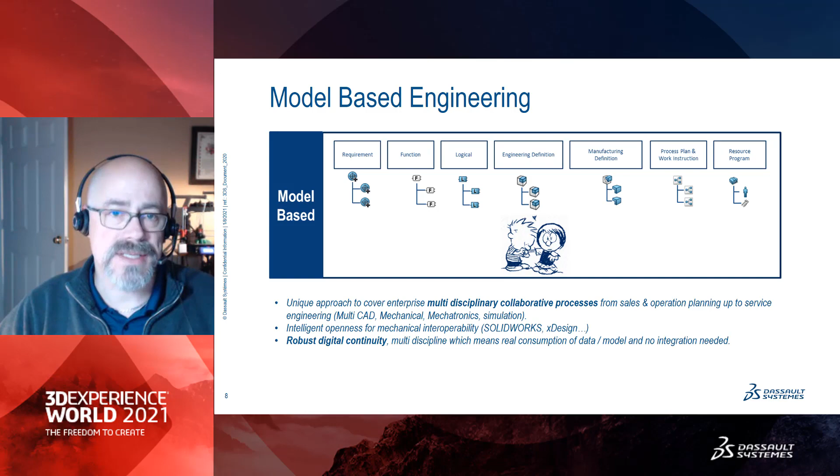Whether it be requirements definitions, logical information, engineering definition, manufacturing definitions. All of these have their different requirements for the overall model-based engineering. How do we bring those all together? Model-based engineering starts to do that, but we need to bring it together.

Engineering is at the core, right? And that engineering definition, you have part numbers, you have designed components, you have purchase components, commercial items, you have software that's being created, you've got mechanical components, you've got electrical fluid, electronic software, a wider range of things that all define and come together in this engineering definition.

The CAD designer is working on their tools. The BOM engineer is pulling together information for the rest of those areas. So we talk about the bill of materials on a regular basis in the context of SolidWorks.

A bill of materials at its core is a list of raw materials, subassemblies, intermediate assemblies, subcomponents, parts, quantities of each needed to manufacture and produce that end product. From the engineering point of view, that's taking into account all the individual physical components that go into this product.

From the manufacturing bill of materials point of view, now we're starting to say, what are those components? How do they come together? How are they fabricated? How do we get them to be a finished product? Of course, from the purchasing point of view, we need to source where do we get those components.

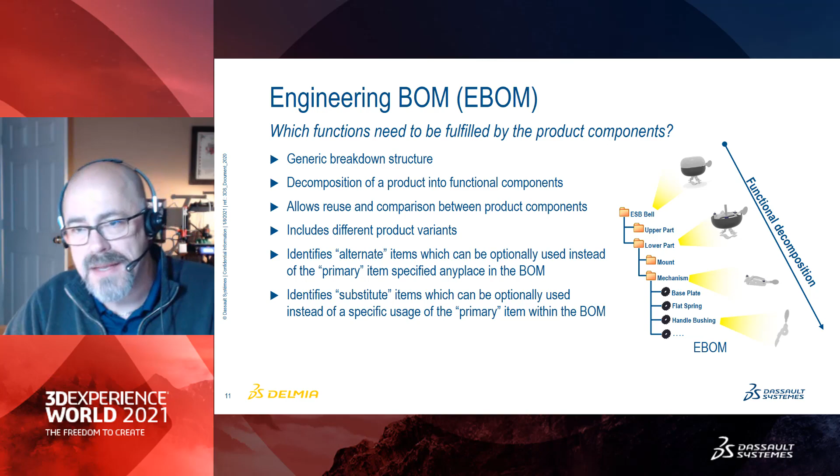All right, so the engineering BOM. This is a generic breakdown of the components. There's usually individual parts. There might be alternate items. There might be substitute items. But at the end of the day, they come together to create that physical product.

Manufacturing BOM, as I said earlier, gives us a means of what are the assembly steps. What are the processes to take raw and purchased components and pull them together to create that final finished good?

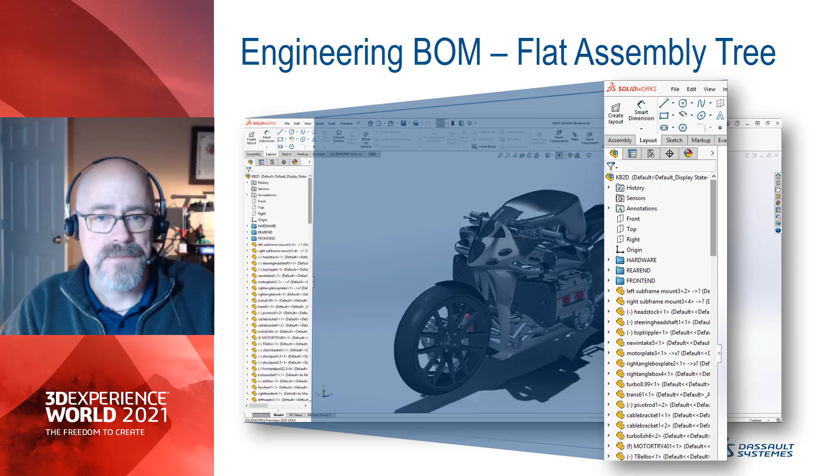From an engineer's point of view, they're going to create that engineering bill of material, that assembly tree that's associated with the components and the final assembly, and put it together in the form that they need to.

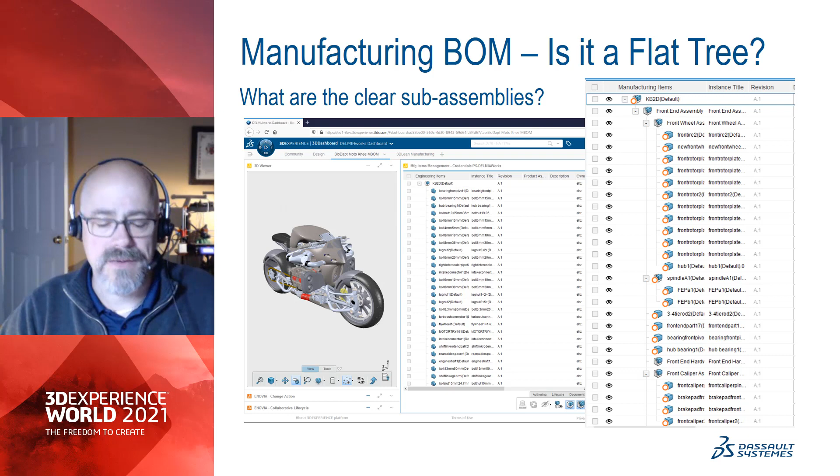From the manufacturing point of view, it's not necessarily a flat tree. In this case, we've got this motorcycle that's got a lot of different steps, maybe assembly steps that we're taking into account. That's where the platform gives us tools that allow us to take the engineering bill of materials and convert it into the manufacturing assembly tree.

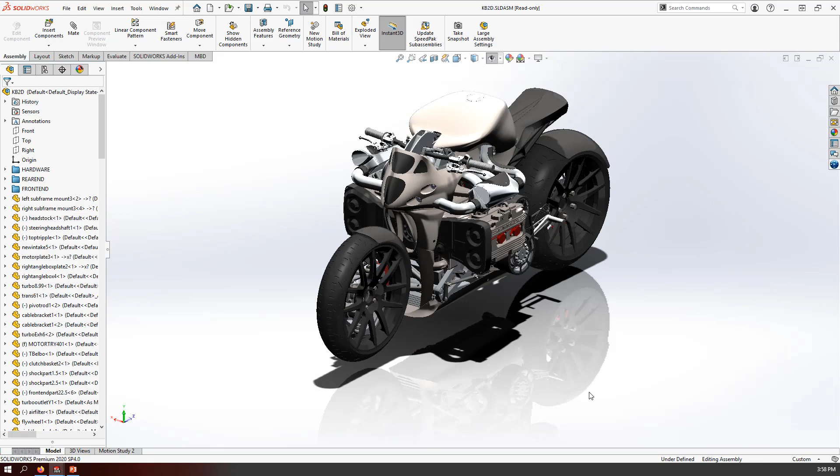So let's have a look at what I mean from the engineer's point of view. Here I have the motorcycle, this kickboxer motorcycle, and as the engineer, I've pulled this full assembly together, and I've left it in a flat assembly tree.

To be sure, I've got some clear sub assemblies, one for the front end here, one for the rear end, maybe even some hardware that I just wanted to pull together. I'm leveraging folders within SolidWorks to accommodate that.

And naturally, because I'm working with the 3D Experience platform, I'm using the platform as a tool to keep track of what my files are, what the revisions of my files are. I'm letting that happen up in the cloud with the 3D Experience platform.

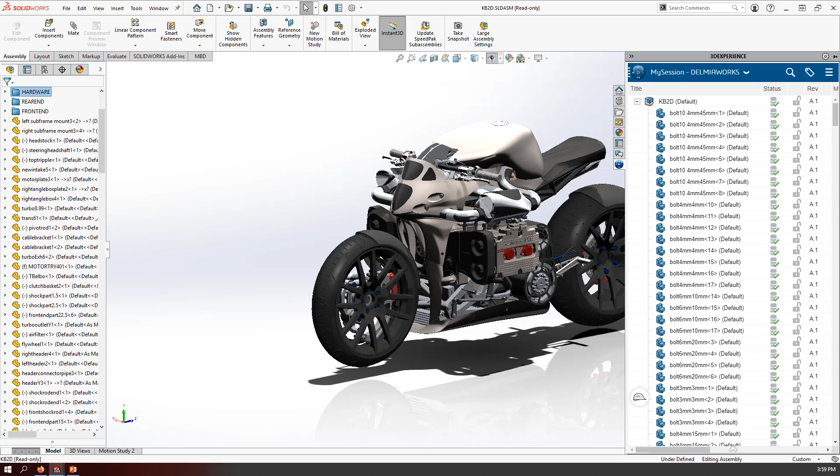Now, if I switch gears for that, once it's on the platform, I have this engineering content that's already up here, ready to go. I can see my full tree of that motorcycle, just like I saw it in SolidWorks.

But that's for the engineering point of view. From a manufacturing point of view, I've started to pull together a manufacturing subassembly. So I've got the front end assembly already in place. I might have a hardware kit that represents just the hardware, so I can kit up the hardware that I'm going to need to assemble that front end assembly.

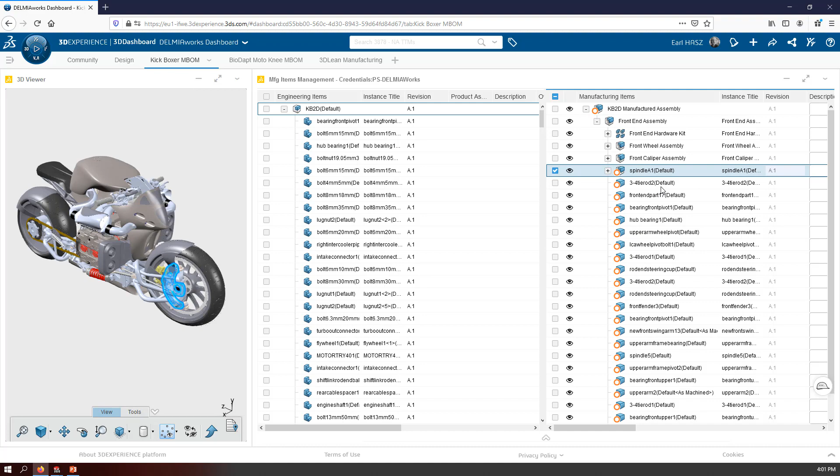I might have that front wheel assembly, and within that wheel assembly, I might obtain a front caliper assembly. I'll get the spindle, and all of the components that are necessary associated with that particular assembly. So I now have some different assembly steps in place from the manufacturing point of view, and it's independent of the engineering tree.

Okay, what did we just see? I showed you the process of the manufacturing assembly. I showed you some provided parts. We talked about the hardware kit, that manufacturing kit, the kit of parts that I need to pull together for a given assembly step. That would be my manufacturing kit or my hardware kit.

I didn't talk about the manufactured material. That would be your raw material, perhaps a stock of aluminum billet, and we're going to mill it into one of the components for that front end assembly. So that would be a manufactured material. We take raw material and the finished component, bring it together. That would be part of my manufactured assembly.

So let's have a look at the specific steps. We're going to have our core assembly from the engineering point of view. We'll put that into manufacturing items management. We'll see that listed in the tree, and then we'll create manufacturing assembly scopes, and create the connections between the two. We'll create subassemblies as we need to for the assembly process, and define the scope for that. So let's have a look at how that works.

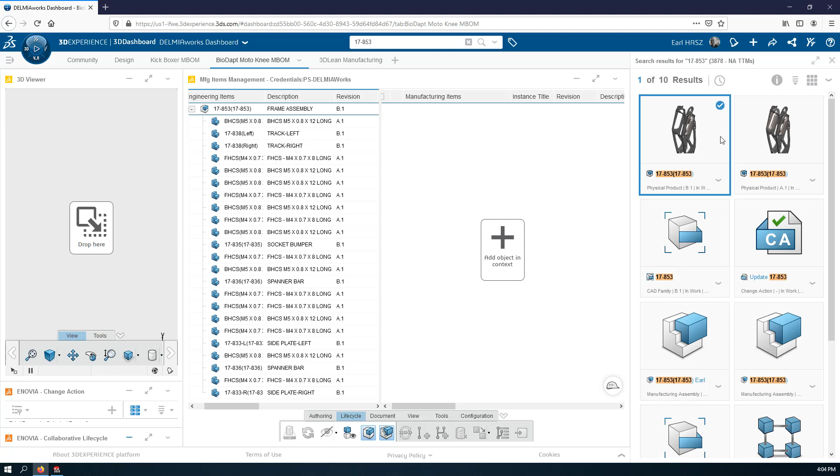So what we're seeing here now is the same assembly tree of that calf, and we'll go ahead and create a manufacturing assembly for that calf to get us started.

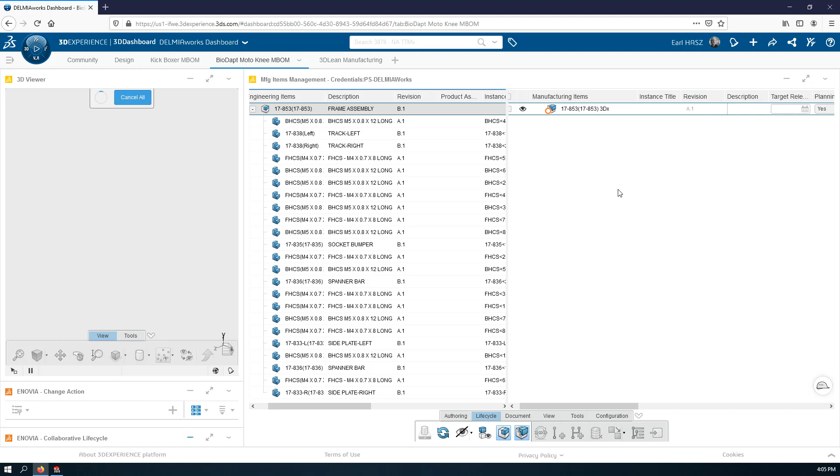All right, so we now have this in place. We've got the full calf and selected, and to be sure, from a manufacturing point of view, I might just assemble all of this at once. But what I'd rather do is break it down as if we were building it in multiple steps.

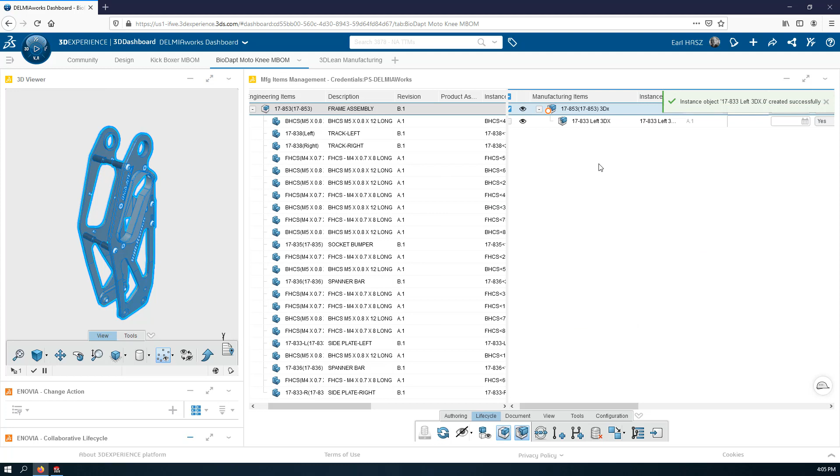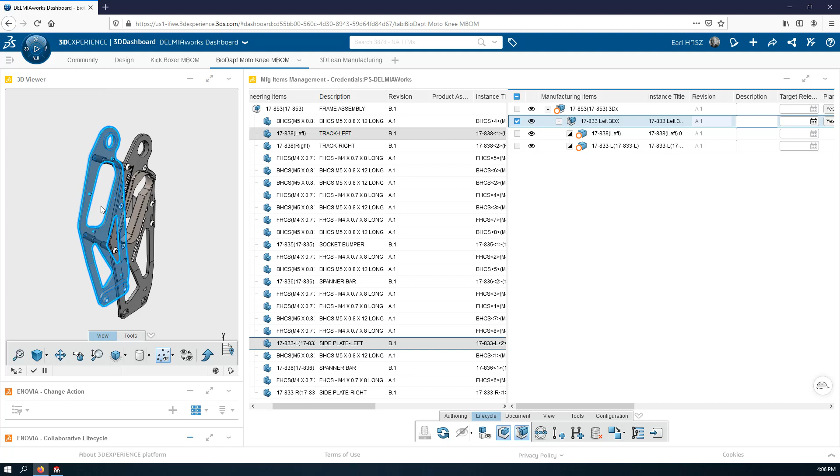So let's say we're going to work on just the left-hand side, for example. We'll go ahead and create a left-hand side version of this, and that left-hand would be the left side of this guy, and we'll find the side plate of that as well. So now I have, if I look at those two, the left-hand side and the components for the left-hand side in place. So let's continue this path.

We'll go ahead and grab the various hardware for that. I always find the wrong ones. So we'll grab the hardware for that left side.

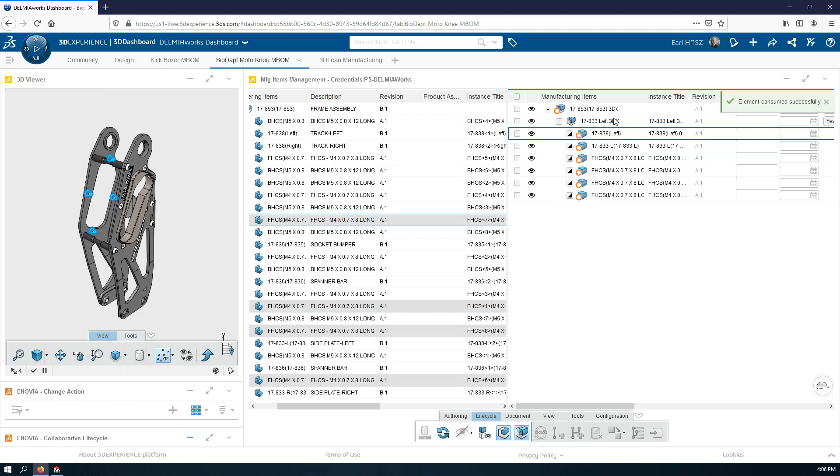So I've built up the subassembly for the left-hand side, and we'll do the same thing for the right-hand side. Grab the right plate. And of course, I moved those into the wrong location, so let's go ahead and move them into this guy here. So we'll move them.

So we get the opportunity to decide, are we going to create new instances, additional instances, or are we just going to move those. So I'm going to take advantage of moving those around and restructure it.

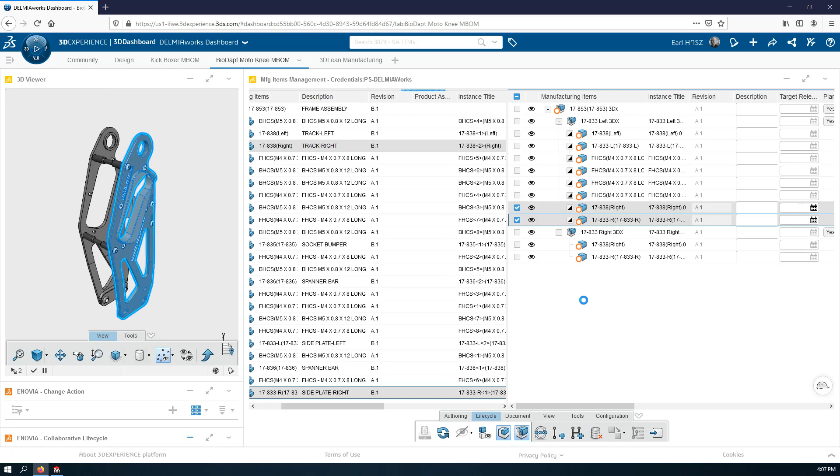So again, the engineer pulled together the assembly tree on this side. I'm building up the tree that represents the assembly process. So that's independent of what the engineer's working with in this regard.

We'll go ahead and grab each of the flathead cap screws, add those in. And as it's building all of this up, I go through and look at some of the tools that we have. We can actually see which components we've actually taken into account, so I have a visual cue.

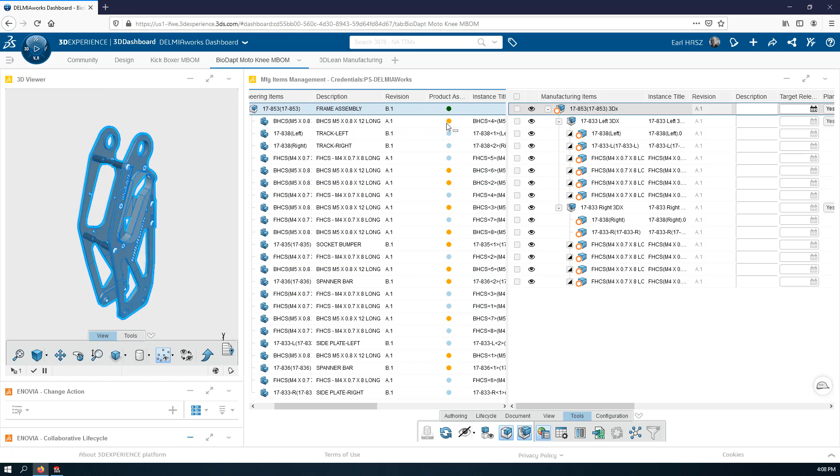So this is the top level assembly, but then I've taken into account each of these separate items in my tree. So I know that I have additional work to be done on these other aspects. So what I'm going to go ahead and do is go grab these other items. We'll just drag them into the top level here.

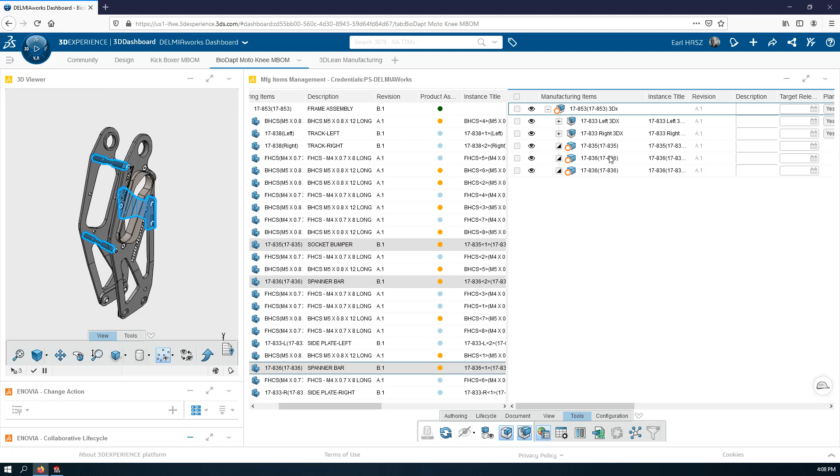So now I've got the two subassemblies, the left and the right-hand side, and the main parts of the assembly. Now I could go ahead and create and bring in all of the remaining hardware. So this gives me now the full tree that I have that I'm looking for my overall system. Now it's ready for assembly.

All right, so we've created that content. So now what happens? We've built up that assembly tree. We've sent it off to manufacturing. But now we might have that scenario where we're going to follow the process as we make changes to our assembly. So the first step is to modify that structure, and we would do that in the context of our CAD system.

The platform gives us a tool to do some revisions. We'll create a revision and we'll replace that with an example. So let's have a look at how that works.

All right, let's head back over to SOLIDWORKS then. And again, we're working with this CAD, and at the moment we're going to make some changes. So let's start off by focusing on the right-hand side of this guy. We'll go ahead and create a new revision for the side plate here, and let's go ahead and create another for this particular side plate. So we'll just go ahead and add a couple of revisions to that.

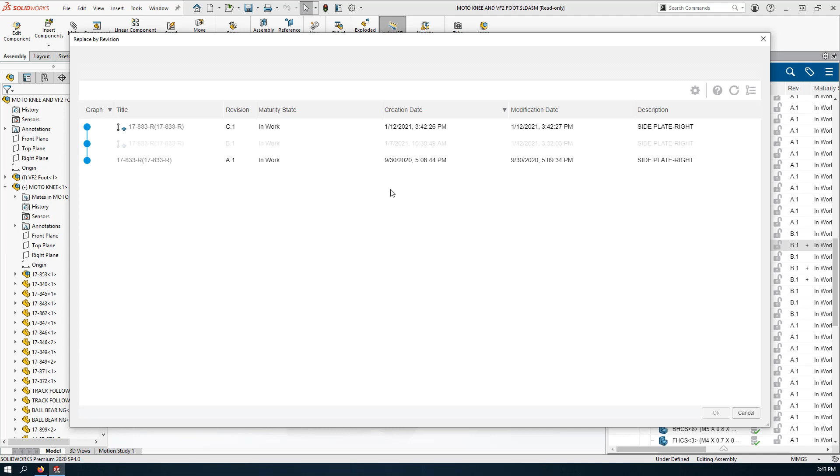And so now it's listed as being out of date because there's a newer revision in the system. So if we come back into here, we can go ahead and replace with that revision, and we can actually see which revisions are out there. We've got the original, we've got the next one, and we'll go ahead and grab that latest revision, get it replaced.

So naturally, if there was geometry changes to it, then we would see it there. But in this particular case, we're not. So let's go ahead and replace the second one.

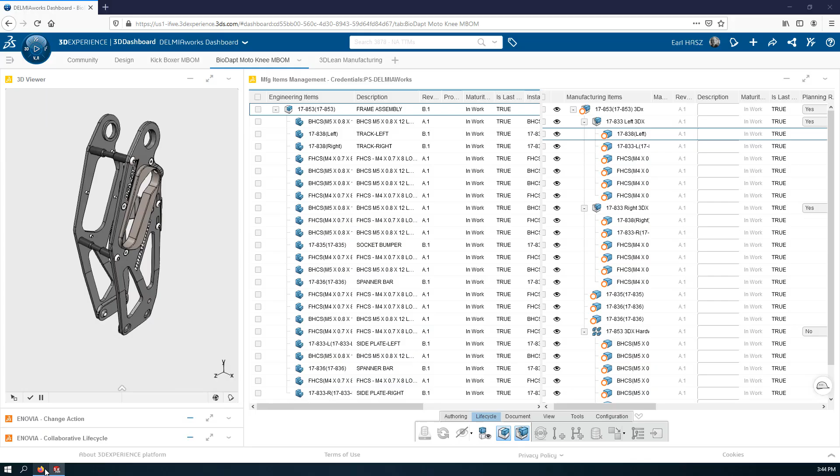And so now we've got the updated versions of both this guy and this guy. And of course, because it's the same component, the other side has been updated as well. So now we've updated the system for the different versions. What we just saw was that assembly tree, and we've just created a simple revision in SolidWorks. We could do this wherever we're working, whether in XDesign, SolidWorks, or any other CAD system connected to the platform.

So the next step is to do an MBOM impact analysis: find out what's been changed between the engineering bill of materials and the manufacturing bill of materials. We'll do this through the manufacturing items management tools, or MFG, and we'll see that in the context of that product assembly - what's changed and what parts or assemblies in the tree need to be sorted out.

The next step of that process will be to generate a change action. So we will go through and use some of the ENOVIA tools to create a revision, effectively an ECO - a change order for our MBOM. So let's go ahead and create a change action for our assembly tree as we change it.

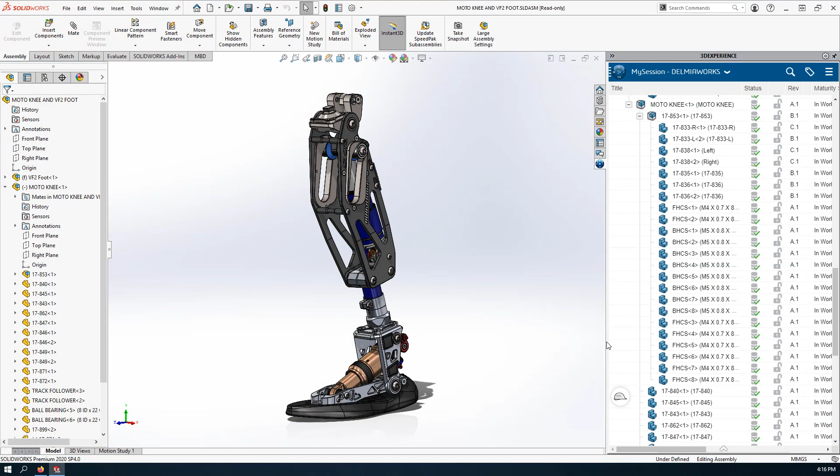All right, let's head back over to the platform. Now that we have items in place, let's have a look at what we've done with this guy. Now we start to see that the components we've made changes to are now no longer the last revision - we can see that these things are out of date.

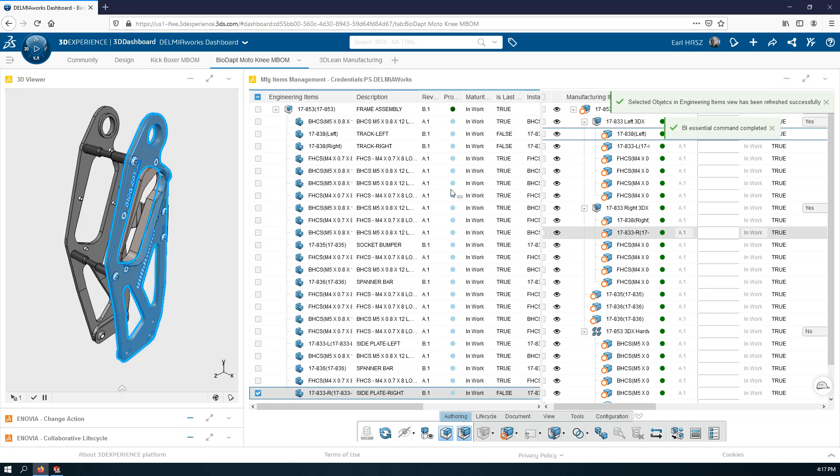So what we'll go ahead and do, once we've updated our view of this guy, is create a change action. A change action is simply a process by which we're creating an engineering change order. In this case, it could have been done by a leader, or it could be done by the engineer.

We're just going to go in this case and update our MBOM. So we'll update, and we'll go ahead and save that. We could give it a due date, a severity level, and so on.

As we start to look at what that means here, we can apply it to whomever is interested in it on our team, whomever has activities associated with it. In this case, that's going to be myself - I'll be the assignee, I'll be the approver, and so on. I could also be the informed user if I was someone who needed to know when something changed, but not necessarily know information about it at that point.

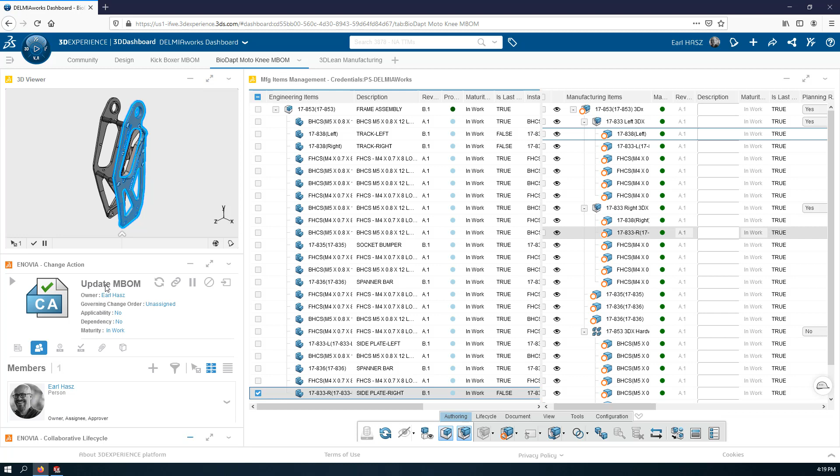So now that we've created that, we've done the work - let's set that into being in work. We've gone from a place where we've assigned that change action, and now we're switching gears to a point where we would apply it to the actual activity.

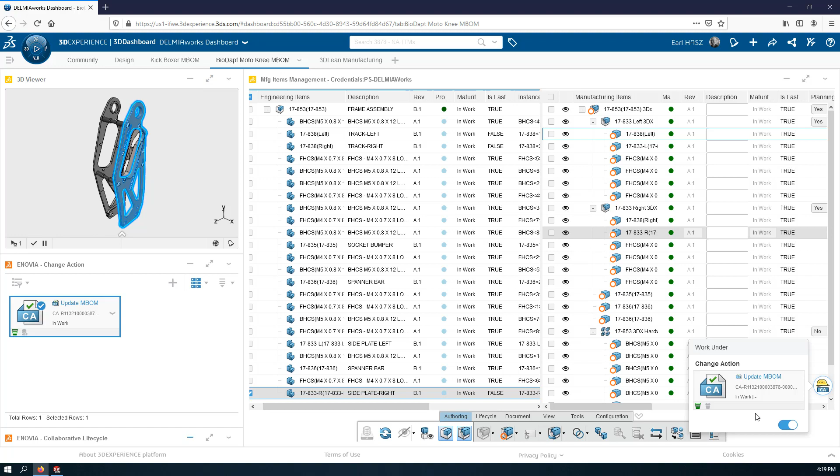And so we'll go ahead and apply it to the manufacturing items management, since we've got some changes that need to occur to that. At this point now, we've created and defined the change action that needs to occur here.

All right, so we've created that change action. Our next step is to go through and update the MBOM - we need to make changes to both the MBOM and get everything up to date. So the first step is to find out what's changed.

We'll make sure that the engineering side is up to date, so we'll go ahead and do that. The next step is to make sure that the MBOM is up to date - it's going to make sure we can connect those two together, make sure we have the right versions of each of the components, and give us the tools for understanding what we need to do.

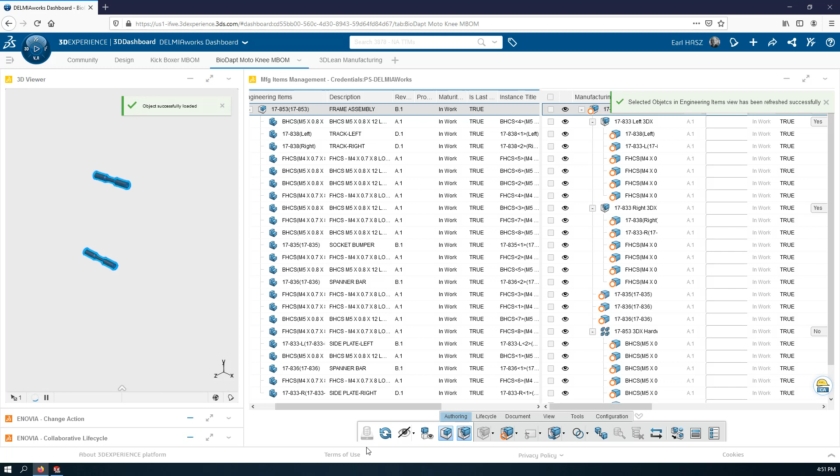All right, so let's go ahead and update, refresh our screen here with the latest and greatest version. And so we have the updated version of our tree, and let's go back into our BI tools, and we see that the components we've changed are now updated with the content we're working with.

So what we can do here now is go through and actually say, all right, which ones have been updated? Let's go ahead and update the items based on the changes. This gives us the opportunity to update these revisions as we like - we can do this automatically as we need to.

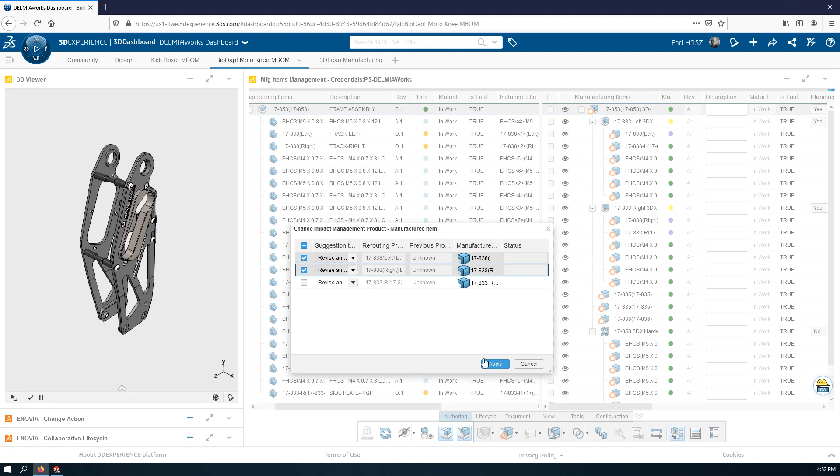So that guy's going to go ahead and update the 17838. If we look over the 17838, that's been updated to the new revision, and it has created a new revision based on the model. So if I take a look at the revision, it's pointing to the appropriate revision of that component.

We see that I still have some work to be done here on the 17833R. So we can go in and take advantage of creating a new revision of that component. It'll add a new revision to this guy, and we can then go ahead and...

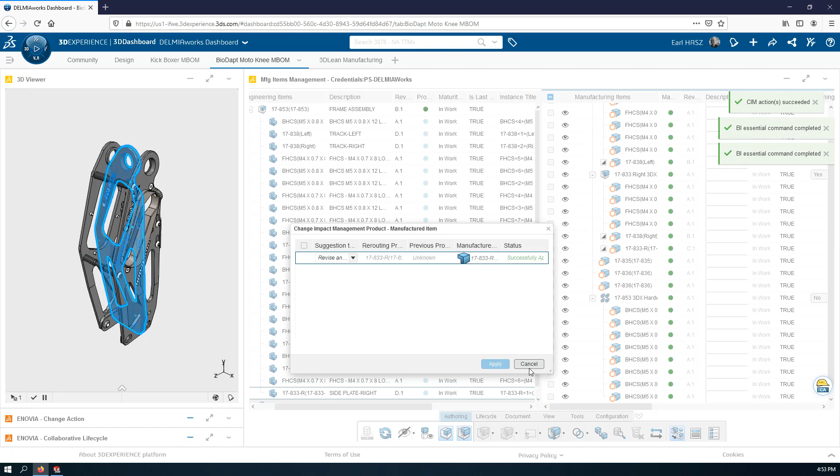update that revision into the system. So we're on our way with respect to the components. Now if I look at this tree here, we should see the updated versions. We can go ahead and hide that extra item in the tree. Now that we've created that, we are done with updating our MBOM.

So we've just created that. We now know what the change has been done. We can go ahead and release those changes. So now we've made the changes, we can go back to our change action and indicate that it's been done within the system.

So we can change the life cycle of our change action and set our MBOM to the next step in the life cycle. And if there were other people assigned to that change action, they'll get notified of the changes that have occurred. Then we'll go ahead and release it to set it into an approval state.

So now we have the engineering BOM up to date in our manufacturing items management. We've updated our MBOM to match up with our EBOM. So now we're in a state where we've completed our work for our change actions.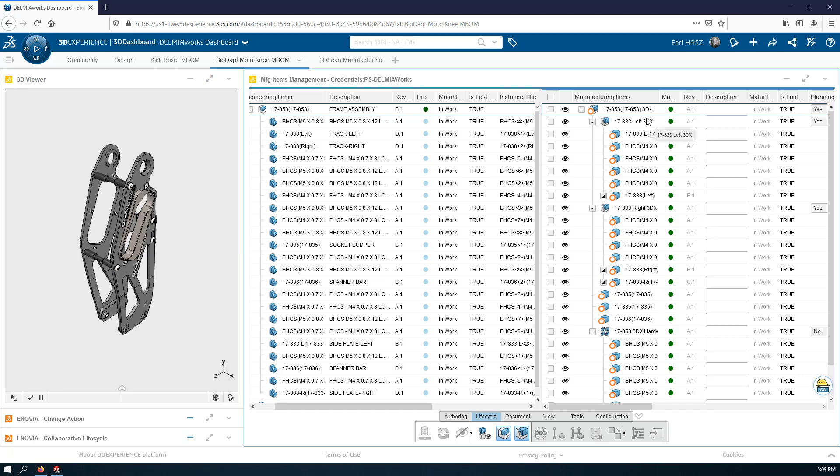At the moment, the maturity level for all of our components for the MBOM are set to in work. Because we're working on this MBOM, we're going to go ahead and change the maturity level from the in-work state to one of a couple of different places. Right now we'll just go ahead and advance it forward to the frozen state.

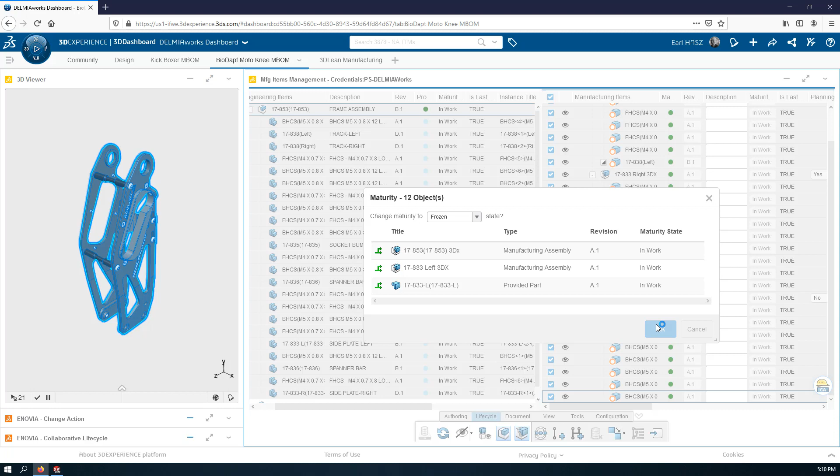So we're going to the next step. We're done working with this MBOM, and now it's in a state that we can go ahead and complete our change action. So now that everything is frozen, let's have a look at that change action.

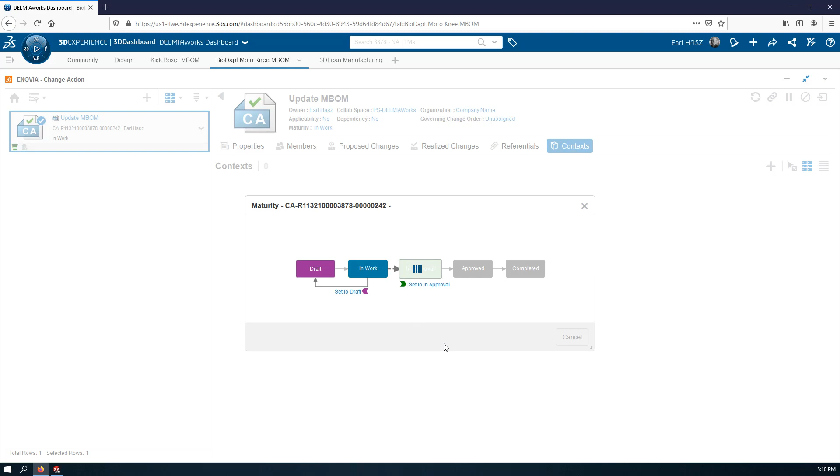We can set up its next step to be in approval state, and it's now going to apply all those changes, and it's going to keep track of those.

So now it's all been assigned, and you see that because I am listed as the approver, I have now received a notification that this change action has occurred. So I can sort out what the next step is. I can go into the approval state for my components. So we're off and running to the next step in our process.

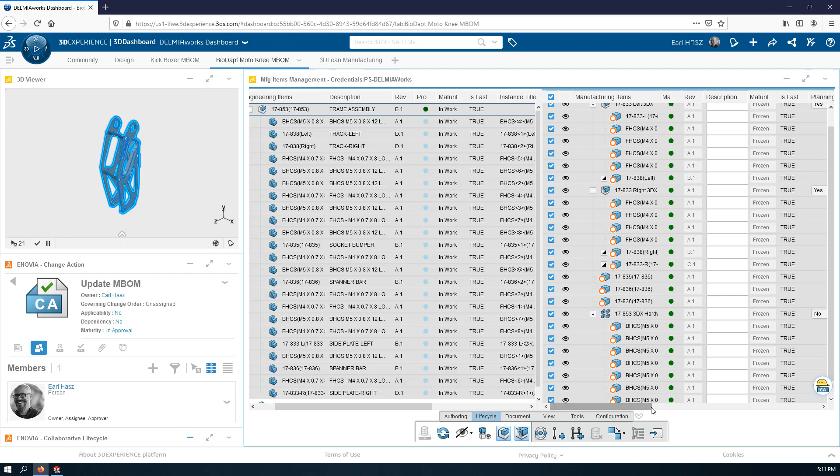So we've gone through that entire process. We've gone through products, we've taken that product structure, built up the MBOM from the engineering BOM. We've gone through how we might go through the changes for the product structure, how do we make our updates, how do we know when we need to make updates, what components in our MBOM do we need to update so that we have the right revisions. And we've released that and notified all of our colleagues that need to know about those changes.

So let's have a look at a possible scenario where this fits in. So now we've created all of this, we've created the MBOM, and we're now working in the context of DELMIA Works, where we're actually out manufacturing this. So in DELMIA Works, we've pushed this MBOM out to DELMIA Works.

And now we're actually building these components, and we now have the tools available to us to keep this information up to date based on our change actions, based on the engineering BOM. We know what needs to be updated, we know how the MBOM should work, and the process is pulled together. We have a nice clean process following our bill of manufacture from engineering through to production.